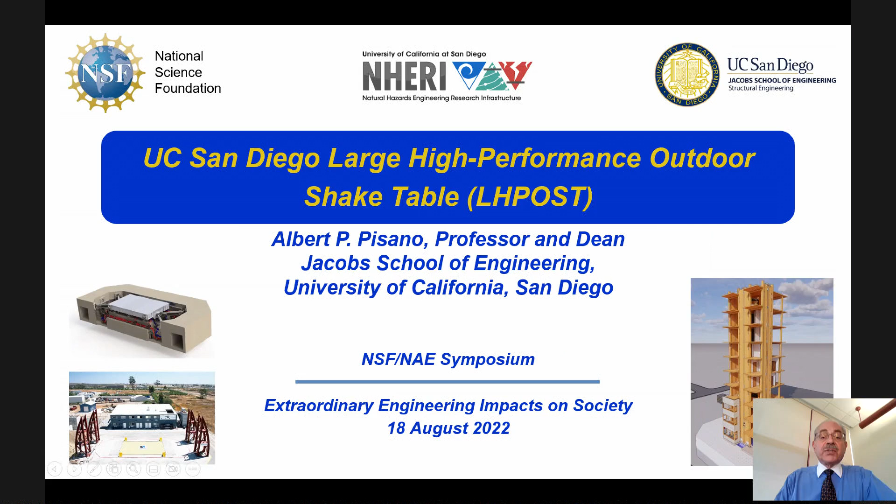So not many people may realize that the NSF has been supporting very large infrastructure projects, not just internet projects, not just communication or big science projects, but very large infrastructure projects for something that you might think is as mundane as a shaker table. And I can assure you there is nothing mundane about a very large-scale shaker table. And in fact, I'll offer some interesting thoughts about LHPOST, which is the Large High-Performance Outdoor Shake Table.

So let me just get to the punchline right away, and then I'll show some of the interesting parts of how all this came together. Many people take earthquake safety for granted, but you have no idea how much in the way of computational models has to be developed in order to try to figure out how a building or a bridge or an overpass or a road might react to an earthquake. And worse, you can't stop at just a model. You've actually got to back that up with experiments. And even more important, the results of both of those have got to be driven through the building codes.

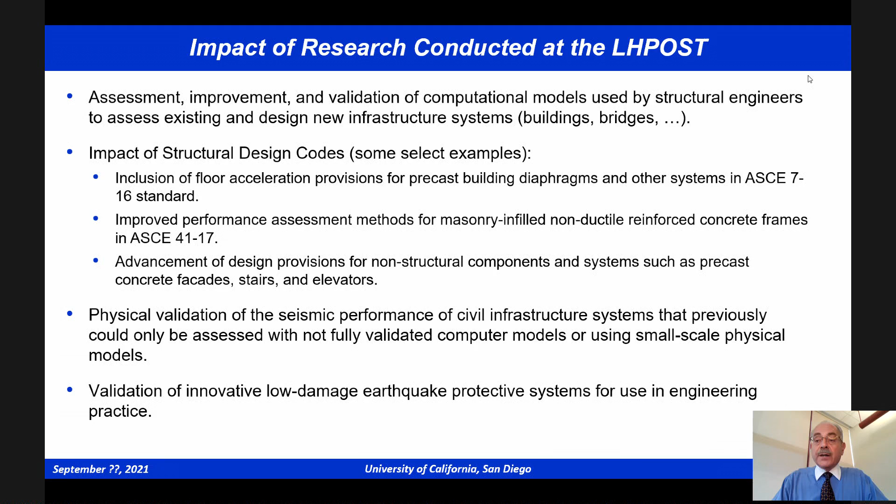This is a case where if you don't go all the way through to working with the state and the federal government and the local authorities to actually see changes in the design codes, then the wisdom of how to save people's lives in an economic and sustainable manner via better structural design just can't happen. And you can imagine there's plenty of research on new kinds of concrete and plenty of research on new kinds of fixtures, but the investments into the infrastructure that is used to test all that is essential. And if it's not done, you will not get the output you want, which is the saving of lives in a way that society can afford to implement.

So let me tell you almost a 20-year story. So many years ago, around 2002, the faculty here envisioned a very large shaker table facility to be built near campus and used in an outdoor format to test buildings of literally unlimited height. There are many shaker tables inside a building. But you can imagine that you can't put a big model in there because if the model falls over, it damages the building. Or worse, if you build a model bigger than the building, nothing fits.

So we're taking advantage of the fact that we could build a shaker table that could carry 400 tons and shake it as any earthquake has shaken a building. And because there was a funding shortage some years ago, that table was designed to be a full 6 degree of freedom motion, linear in 3 directions, rotations in 3 directions, roll, pitch, yaw, but originally outfitted as a 1. And it's only very recently, it was awarded just 2 years ago, and we just had an opening ceremony. The table has been upgraded to full 6 degree of freedom. So the United States possesses the largest weight bearing, the largest height capacity 3D shaker table in the world.

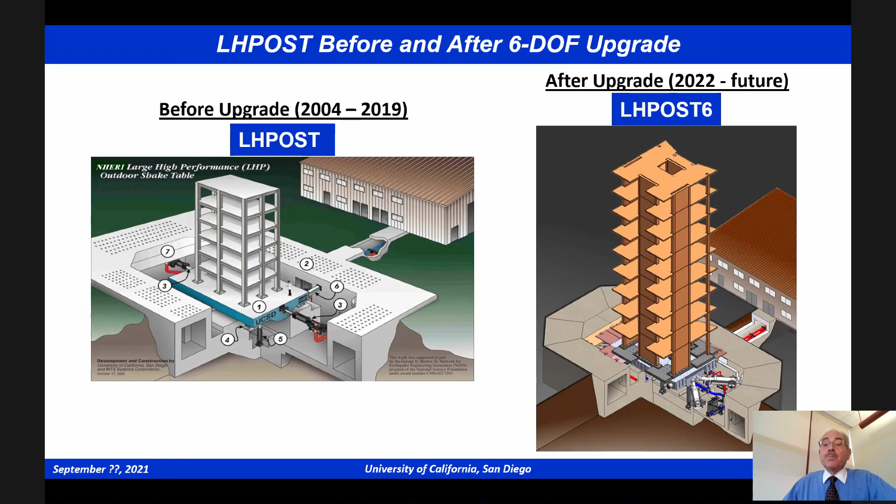And that is one of our secret advantages to having the best earthquake standards on Earth. So we were very honored that the NSF director, Panch Panchanathan, came to the commissioning ceremony for the 6 degree

of freedom system. And being a mechanical engineer myself, a personal note, I worked at General Motors, Singer sewing machines, and Xerox photocopiers. I was an engineer in the pen, as it were. I have a deep love of seeing science and engineering instantiated in physical things. And so I couldn't resist putting this video up. It only takes a few seconds.

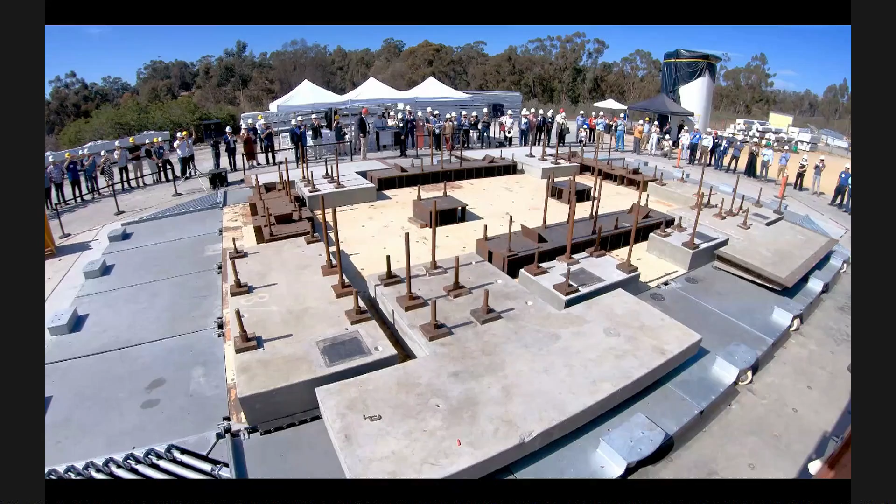Whoops, sorry. All right, so what you saw there was a simulation of the Loma Prieta earthquake, one of the most destructive earthquakes in the United States. Imagine 400 tons on that table and all those rapid motions occurring despite that huge amount of weight and inertia.

So there's an engineering story behind the engineering of earthquake safety, and it's how on earth do you engineer a huge, huge table that can shake huge, huge structures? And I won't go through all the details of it, except to say it is a huge endeavor. There is a huge building in which several electric pumps labor away, 400 horsepower each, pumping up the pressure in a huge set of reservoirs.

And remember, the pumps may run for hours, but the earthquake simulations take just seconds. So 400 horsepower is the rate of one of the pumps. But if you release all of that energy 1,000 times faster, that's the equivalent of 400,000 horsepower at that moment.

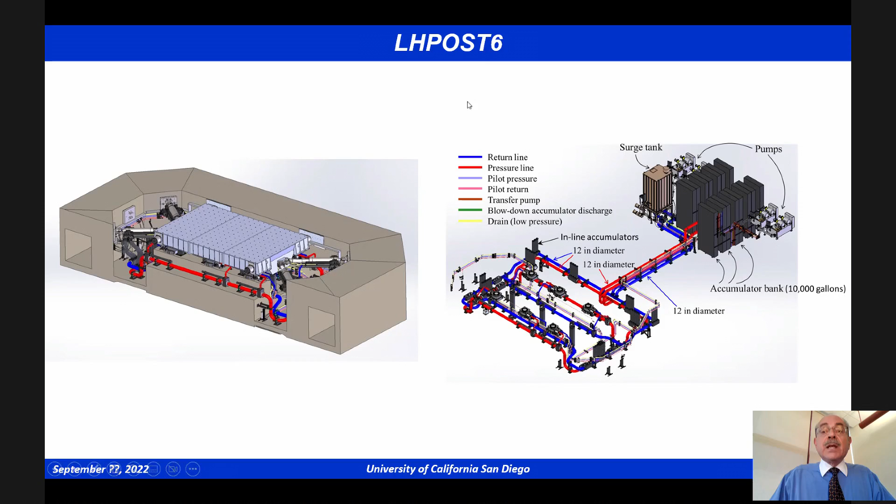Huge piping and a bunch of engineering challenges to be able to enable us to use special hydraulic oil that does not absorb air, in order to push a set of servos around in order to implement all the motions to the building. Now, you would imagine, well, okay, earthquake safety is all about things like hospitals and stuff.

No, you actually have to worry about parking structures and other artifacts, because if those buildings collapse, they cause damage to their environment. You would say, well, wait a minute, parking structures. No one likes to put a lot of money into parking structures. It's a tough business running a parking structure business. If I were to implement extremely burdensome earthquake codes, I could deleteriously impact the economy.

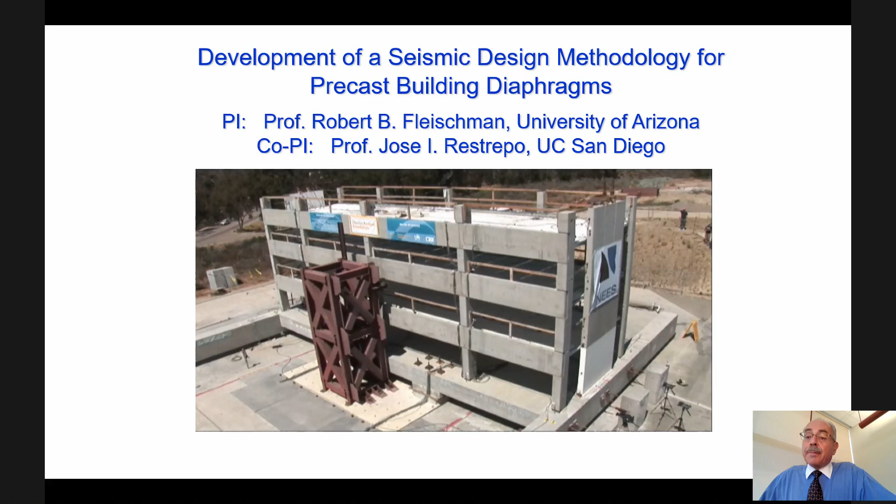Well, one of the special tricks that we do with earthquake testing is we work on what is the minimum reinforcing you need in order to make a building stand up. This reduces the weight of the building and increases its ability to withstand an earthquake. So let me show you what happens when you have a poorly designed structure.

So what you see is that the structure is actually coming right off the foundation. This is a case where you have not correctly assumed the directions of the forces. The structure may have been stronger in a different direction, but we found the particular weak point of this structure, and as a result of this, there were building code changes made in order to improve earthquake safety.

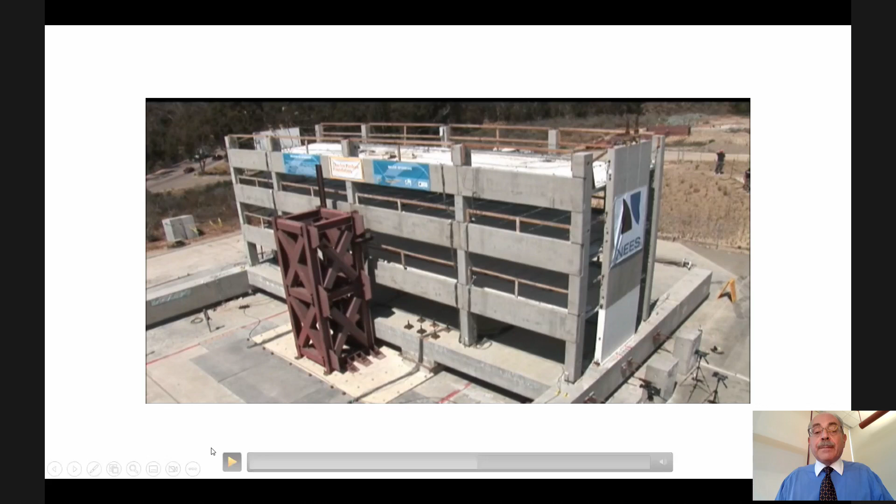And the thing I'm pointing to is that big slab of concrete all the way at the right with NEES written on it. That was supposed to be a stabilizing plate for the earthquake in that direction. You saw that it came right off the foundation, and therefore we stopped the test before the building fell over. If you take highway safety for granted,

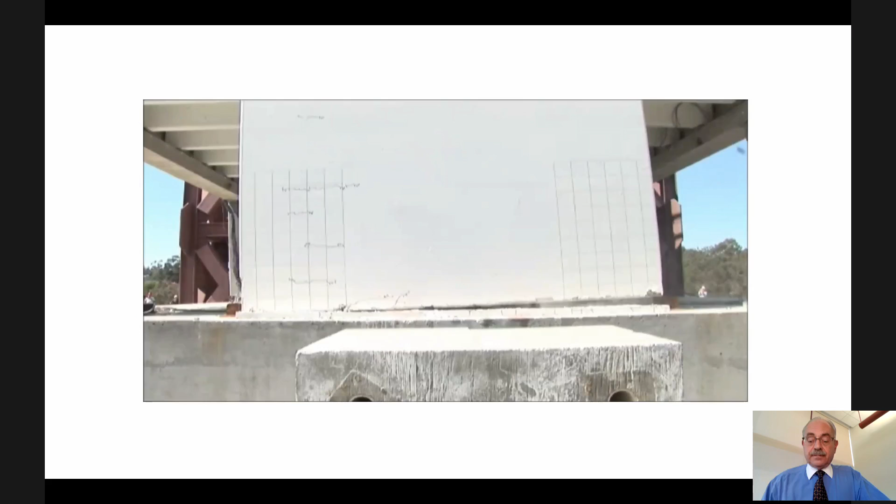so I'll stop there and say that was a close-up of if you don't think of all the details about how to build a structure, you can leave a flaw. That flaw will cause a crack. The crack mitigates the ability of the stiffening structure, and the whole building fails.

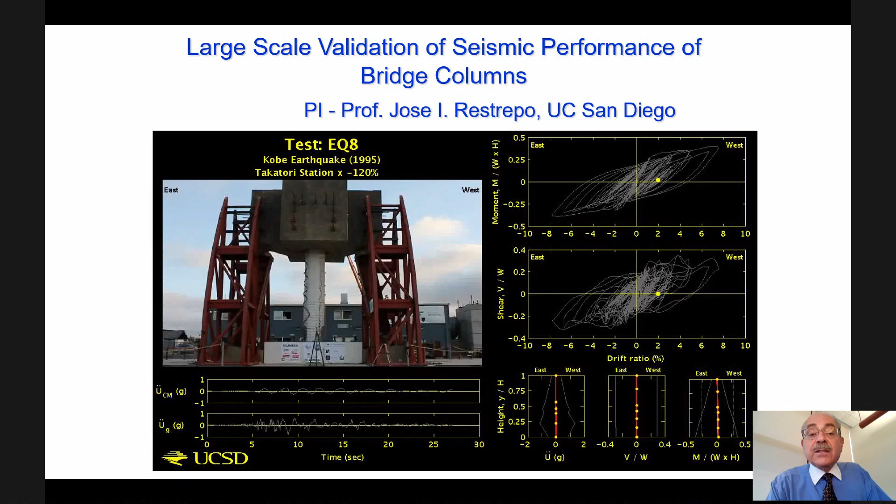So we all know that a lot of engineering is about getting the details as well as the overall plan right. Earthquake testing is where any flaw that exists will come to the surface. Now, I won't go through an endless series of structural tests, but I do want to offer that if you've ever driven over a bridge, then you should be thinking about the ability of that bridge column to sustain damage, and I won't run the test here.

If you've ever driven over a structure made of pylons, this is a structure that was used in the Takatori train station, and we're simulating the Kobe earthquake of 1995. Just by looking at the picture, you can see that that column did not do well. And you would say, I can't imagine why. It's filled with steel and excellent quality concrete. Well, it's all about the direction and the lay of all the materials.

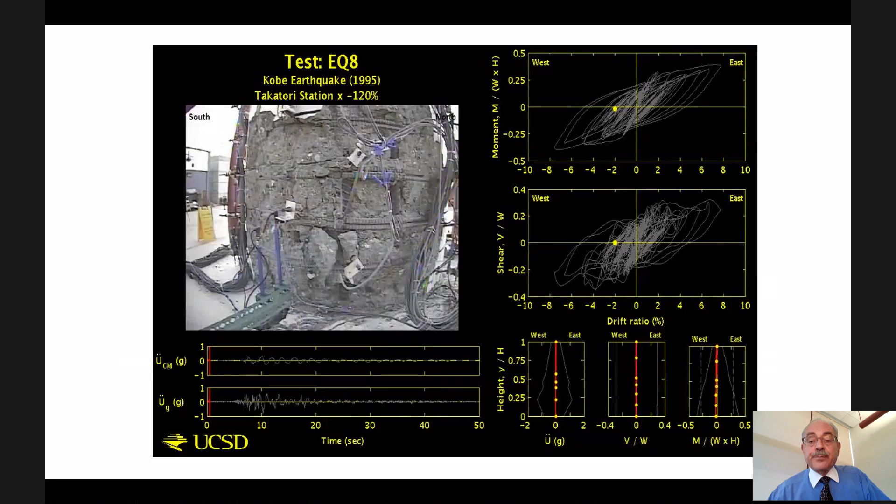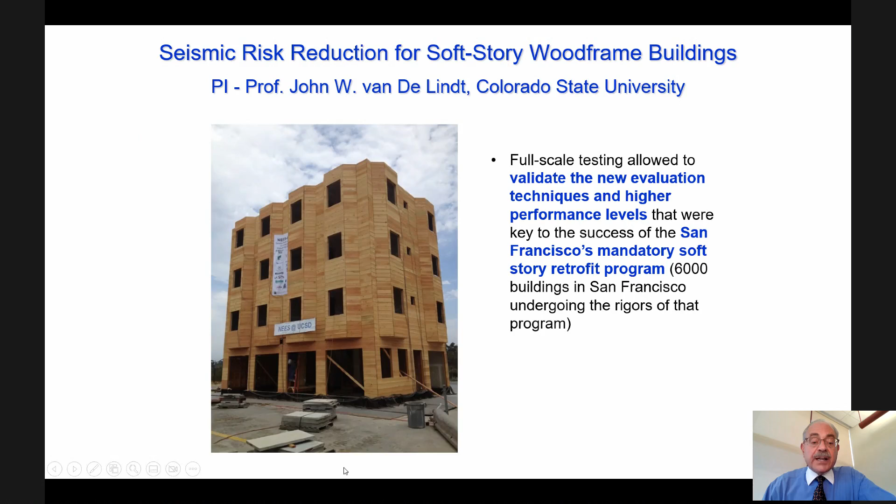What if you didn't have to burn all that limestone and make that cement? What could you replace it with? Well, for many structures, you have a naturally carbon sequestered material called wood. Carbon dioxide from the atmosphere is captured by trees and used to build the cellulose that we enjoy in the wood that we harvest from the trunks. Here's an example of large-scale wooden structures. This is a large-scale wooden structure that has a design flaw. These are always more interesting than the ones that don't have flaws. I'll just play a short video about that.

All right, so that is a reconstruction of a typical building built in San Francisco. You'll notice all the red reinforcement structures we put up because we knew it was going to fall. We have since worked with the state of California to put together the retrofit rules so that without putting people out of business, without driving people broke, you can actually correctly retrofit the building in just the right way so that you don't get that catastrophic collapse.

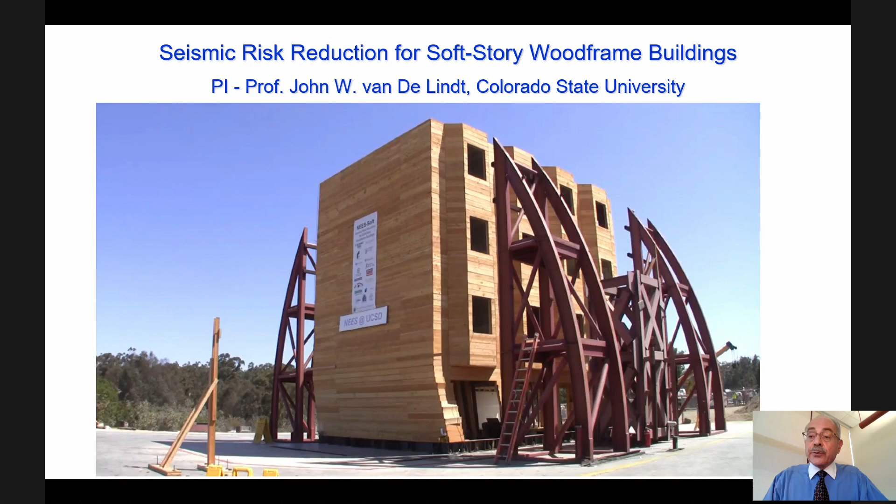And those of you from the West Coast would recognize that as 3 levels of apartments built over a first floor, which is entirely garages. So you'd say, well, it looks like they didn't reinforce the first floor enough. And you're right.

So let me wrap this up by saying there are a myriad of things that need to survive disasters. And I won't go into the combined disaster work that we do, wind and earthquake, earthquake and fire, fire and earthquake, et cetera. But I just wanted to make a point. There is a lot of investment in infrastructure that no one pays attention to, and that infrastructure is what makes the engineering and science advancement go forward. So there's engineering within the engineering itself, and many of these things have direct impact on saving lives and making our society more resilient against disaster.

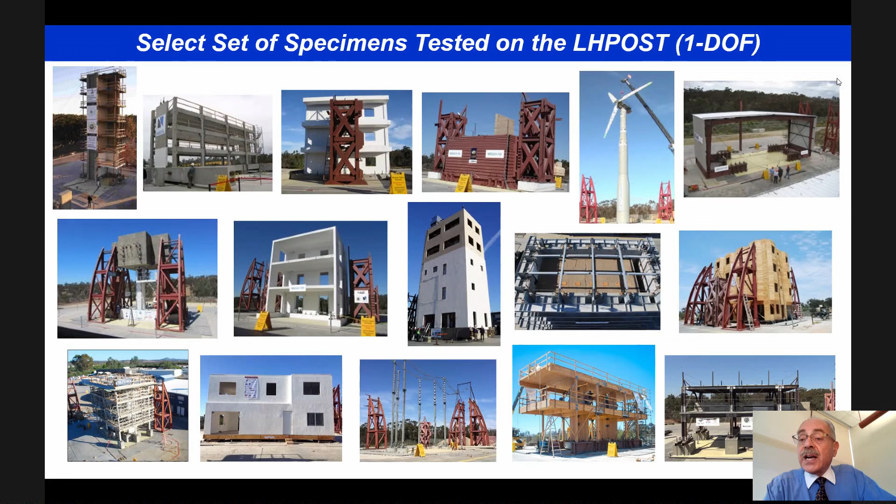So Ed, thank you very much. I appreciate the time. Thank you very much for a wonderful talk and for great videos. I will express some disappointment that you didn't find the opportunity to shake up my dear friend, Chancellor Khosla, using your shaker table, but I guess we'll leave that for another time. That video was embargoed. I'll leave it at that.

All right. The question I have is, you personally have also been involved in MEMS research as well, which also is about rigid structures and vibrating structures, and I'm wondering, is the big of earthquake and the little of MEMS, are there things that relate to each other in terms of the research and how you build resilient structures? Yeah, so Ed, the answer is yes, indeed, and the meta wisdom, the size and time scale shift wisdom, is certainly there. All the vibration modes, all the deflection modes you see in these large structures exist in microstructures. Except that you excite them differently and you measure them differently.

And in fact, I'll offer this as a thought. Every electronic signal processing system, every filter, every radio, everything, eventually runs that electrical signal through a mechanical structure, a SAW filter or some other structure similar to that. All filtering is done mechanically. So these vibration modes have analogs at the microscale, nanoscale, and I find it interesting to see that, yes, there are strong parallels between them, and there's a lot of wisdom that carries back and forth across the two.